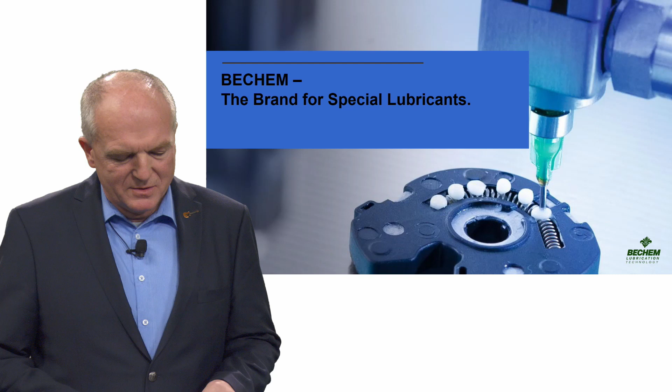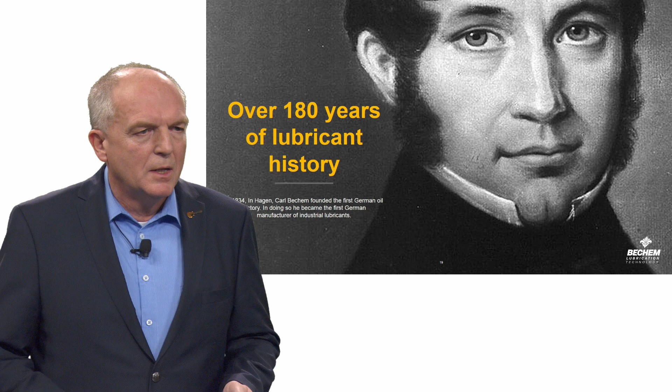Yeah, indeed. Good, so Harry, why don't we start with the introduction of BECHEM and learn a bit more about that fabulous company. It's a pleasure for me. Just a few words about BECHEM. So BECHEM, the brand for specialty lubricants. BECHEM was founded by Carl Bechem, and this is the reason for this name. He founded this company in 1834, and this is the first oil-producing company in Germany. Nowadays, we are not only in Germany anymore. Of course, we are, but we went global.

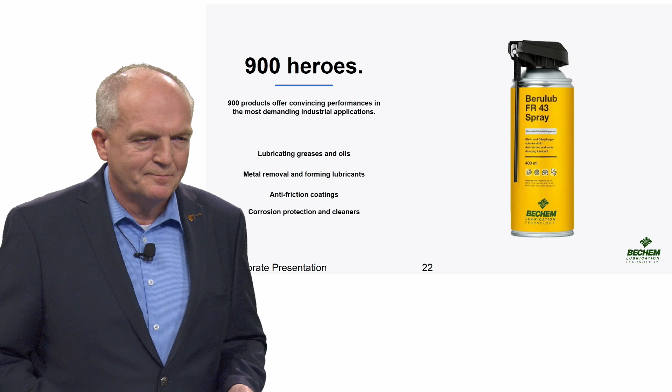More or less 900 living products, actively sold products, not only spray cans like you see here, but drums would be too big to show here on the screen, so therefore we decided to go for a can, but nevertheless we can supply all kinds of packing. And we are supplying these products in different kinds of industries. The automotive industry, the aircraft industry, the railways, mining industry, earth moving equipment, metal working, metal forming industry, food processing, wood processing industry, and so on. So we are really the specialist for different kinds of industries and different kinds of application.

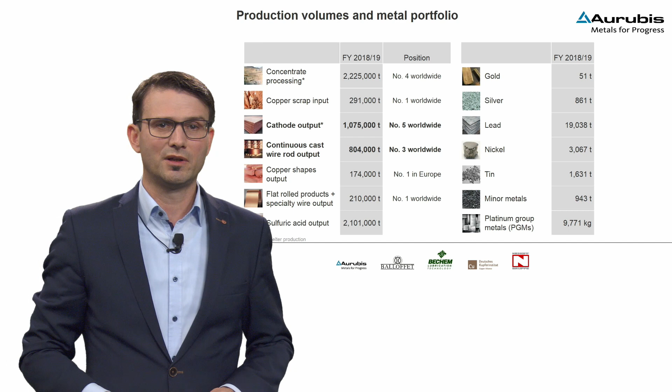Aurubis holds strong and leading market positions in cathode production output and respectively in copper wire rod output. Here you see figures from financial year 18-19 with around 1.1 million tons of cathodes and around 800,000 tons of wire rod. Beside that, Aurubis is a multi-metal refining company and produces metals like gold, silver, lead, tin and others. Aurubis has its own cathode basis, which is a fundamental position for our copper products and especially for copper wire rod, where 75% of all cathodes worldwide are consumed. Aurubis is independent from cathode supply from South America or other regions, but can rely on its own very stable cathode supply.

Aurubis runs a production network of 2 fully integrated plants with cathode and rod production in Hamburg, Germany, and in Olen, Belgium. In Avellino, in the south of Italy, and in Emmerich, Germany, there are 2 standalone rod plants with cathode supplies partly from Pirdop, Bulgaria, and Lünen, Germany, as well as Olen, Belgium. Deutsche Gießdraht, the well-known copper wire rod producer of DG Rheinrod, located in Emmerich, is now 100% integrated in the production and service network of Aurubis Group.

DG Rheinrod is a very well-known brand and stands for highest surface quality and drawability to thinnest wire diameters. The 4 rod lines are in an excellent balanced production network to supply our customers in the EMEA region, from North Europe to South Africa, from Morocco to Egypt, with around 800,000 tons per year of Aurubis rod, Rheinrod.

Responsible sourcing is becoming more and more important due to society requests. Therefore, the copper industry, and Aurubis as part of that, launched in March 2020 the Copper Mark as an industrial standard monitored and assessed by independent parties every 3 years. This goes hand in hand with the LME's responsible sourcing approach. At Aurubis, we like and support the idea that the copper value chain is mutually demonstrating responsibility to improve and develop, and we are looking forward to certified mines.

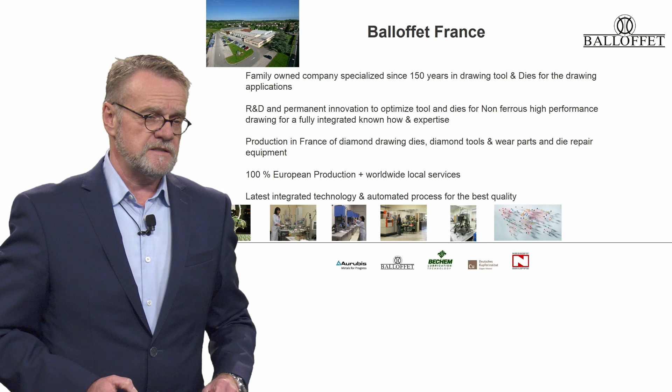We are specialists in drawing dies and tools for the wire industry. We have our own R&D department for permanent innovation and to optimize our products, especially for the non-ferrous industry. Our production is in France for dies and tools and all the wear parts. Everything is produced 100% in Europe with our best automatic process. Our products are drawing dies from natural diamond and PCD, extrusion tools for the cable industry, and also compacting and stranding dies.

Shaped dies is a very big growing market, also for electric mobility. Enameling guides for magnet wire, but also a big repolishing service for all used dies. We are also specialists in training and analyzing die repair for all people working in this field, and we produce equipment for the die shop.

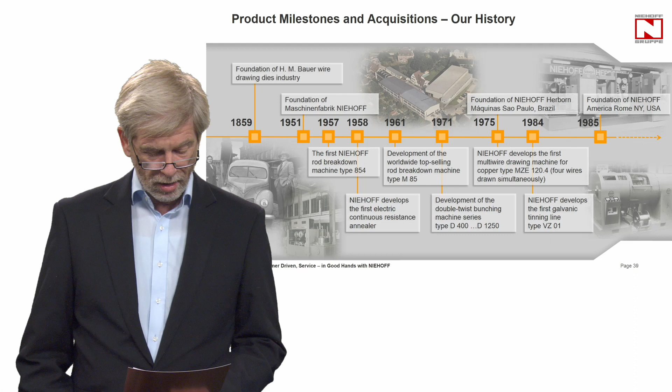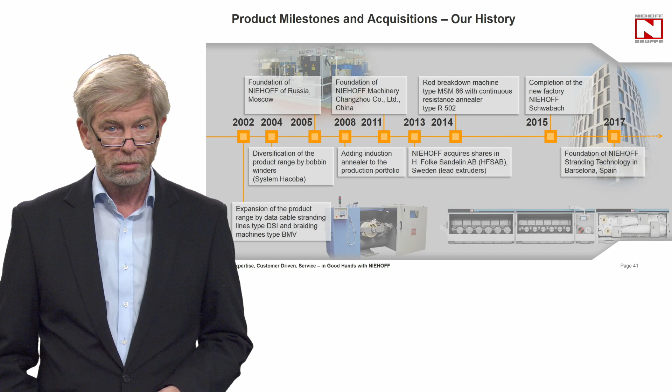NIEHOFF company was founded in 1951, but the roots go back to 1859. Listing all these historical details would be too long. However, the new construction of the factory, completed in 2015, should be emphasized. Locations worldwide: the headquarters and main factory is in Schwabach, factory number 1. Factory number 2 is in Marktoberdorf. Factory number 3 is NIEHOFF of Czech Republic. We also have factories for the local market in the United States, Swedesboro; Brazil, Sao Paulo; India, Hyderabad; and China, Changzhou.

HFSAB in Sweden is a factory for lead extruders. Sales and service centers we have in Barcelona, Spain, in Moscow, in Tokyo, and Singapore. The number of employees: in Germany we have 461, and about 10% of these employees, exactly 50, are trainees. Worldwide, we have 920.

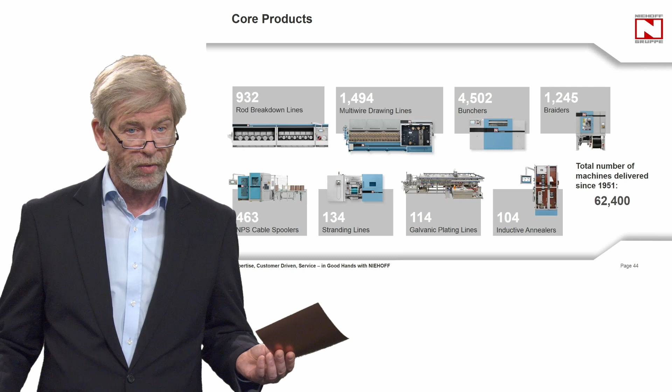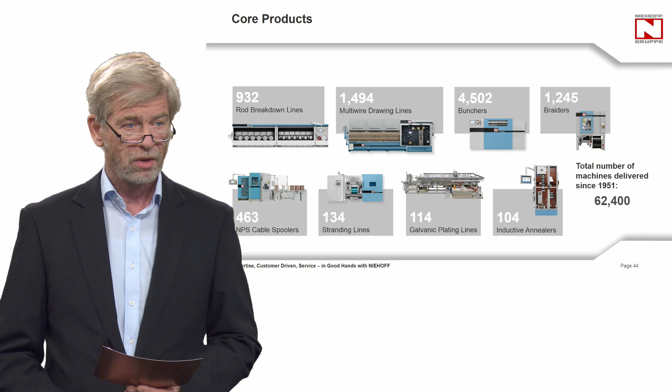Our products. Since 1951, NIEHOFF has produced 930 rod breakdown machines and nearly 1,500 multi-wire machines. We produced 4,500 bunching machines with a bobbin size from 400 up to 2,000 millimeters. Braiders, NPS spoolers, stranding machines for insulated wires, also with a bobbin size from 400 up to 2,000 millimeters, galvanic plating lines, and last but not least, inductive annealers.

Mobility, urbanization, energy distribution, digitalization, power generation. These are the challenges of today and tomorrow. And how to face these challenges? We are partnering with expertise, high cost efficiency, high flexibility, reliable service worldwide. These are the demands on us and how our customers see us.

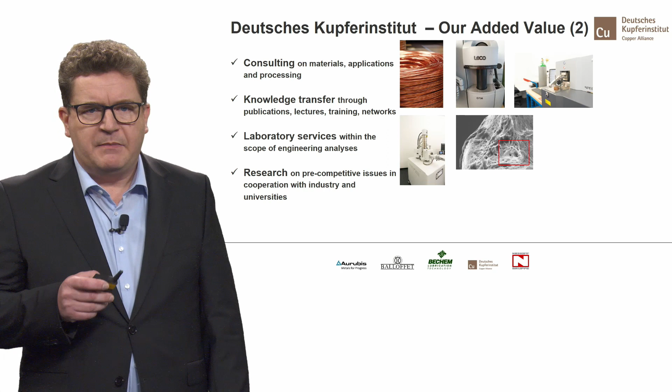Before my colleagues go into the individual system elements of the drawing process in the following lectures, I would like to give you a brief overview of the influencing factors which are relevant for the drawing process and wire breaks. But first, I would like to ask you to answer the following question via Mentimeter. In your opinion, which elements are most important for a successful drawing process? Please choose and add one after the other with a plus symbol. First the most important, last the least important. The die sets, the drawing lubricant, drawing machines, the people in the production process, or the wire material. Please vote now. We will have a look at the results later.

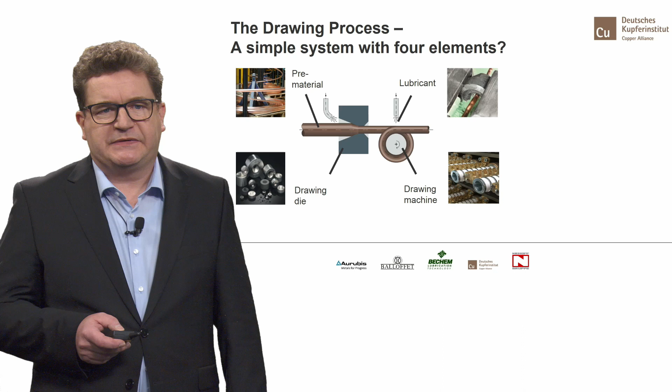When looking at the drawing process, it seems at first glance to be a fairly simple system with 4 main elements. In practice, however, the interlinking of several processes and a large number of drawing steps results in a complex system in which the causes of errors are not immediately recognizable, and the interaction of many individual influencing factors has an impact on quality and process stability. Last but not least, the conception, selection, maintenance, and settings of the system elements are based on the decisions and assessments of the people involved in the process. Knowing about the process and the elements is therefore essential to achieve good results. In the following, we will use cup and cone breaks as an example to explain the influence of the individual system elements: wire material, drawing die, drawing medium, and drawing machine on the drawing process.

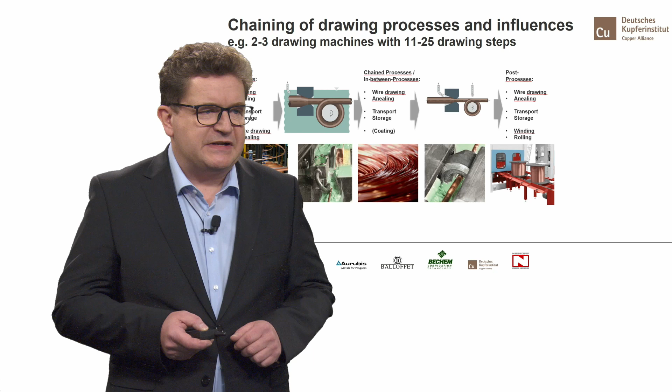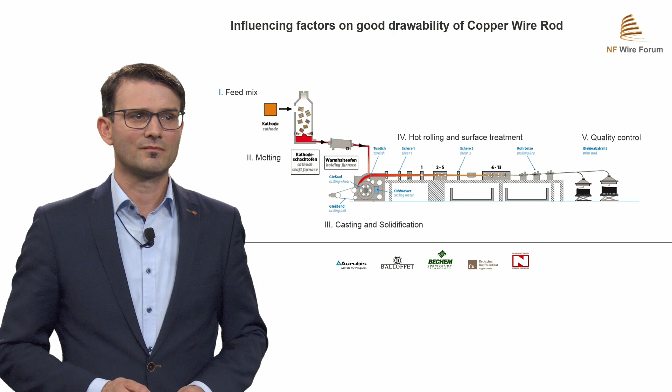Fifth, the quality control, control of the product, the parameter sets of the line, and the required physical, chemical, and mechanical properties. Please see here criteria which are important and are the basis for a successful drawing process of Aurubis rod, Rhine rod. So as mentioned before, best feed mix with grade A cathodes, oxygen content below 250,

a delta temperature of copper melt versus copper solid temperature, cooling water, min-max values, rolling current at the rolling stands as well in min and max values, low defectomat and ferromat signals, good twist test results, and last but not least, low residual oxide layer.

But unfortunately, there are incidences resulting in wire breaks, which leads to downtimes in your production departments. Important is to understand what kind of wire break type the sample shows and what leads to the different wire break types. All in all, a wire break is the unfavorable result of interactions between the wire material, drawing dies, emulsion, and the machines, as well as drawing process parameters.

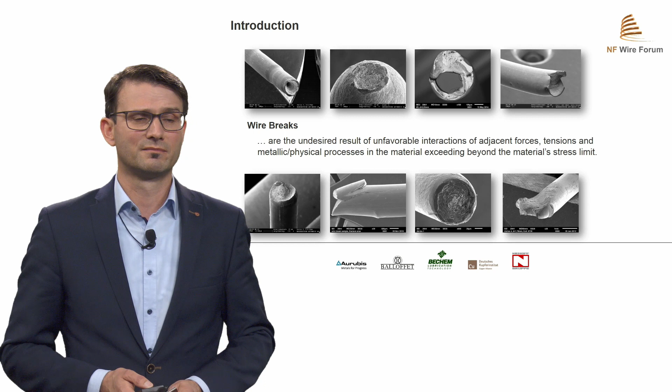In general, there are well-known wire break types, which occur from time to time in each and every wire production facility. There are three main types, which are: first, cup and cone; second, ductile force break; third, inclusion break. The other mentioned types are as well known and present, but with less frequency to our experience.

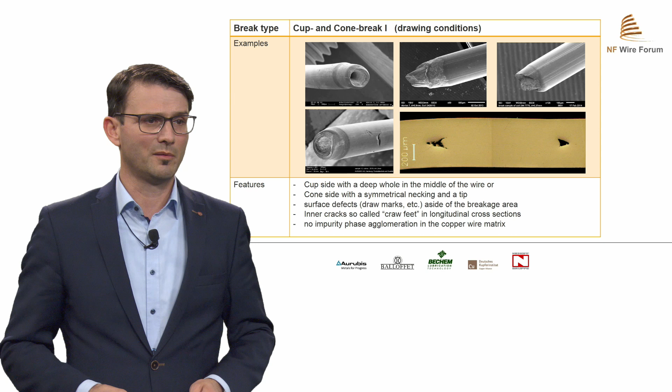What are the damage mechanisms? So high shear stresses between wire surface and the neutral line induce local failures where the max material stress level is exceeded. Then the inner cracks, the crow's feet, are beginning. The tip of the crow's foot is orientated in drawing direction. With additional strain, these cracks grow and reduce the load-bearing cross-section of the wire until the material fails or breaks.

As well, the copper wire rod can influence cup and cone breaks, but that is the reason mentioned at the beginning of my presentation to rule and apply the appropriate production criteria to avoid cup and cone breaks.

Now let's have a look on the Mentimeter results. What you voted, what is your favorite wire break, what you see in your productions. I'm not surprised, cup and cone and inclusion breaks. That fits to my expectations.

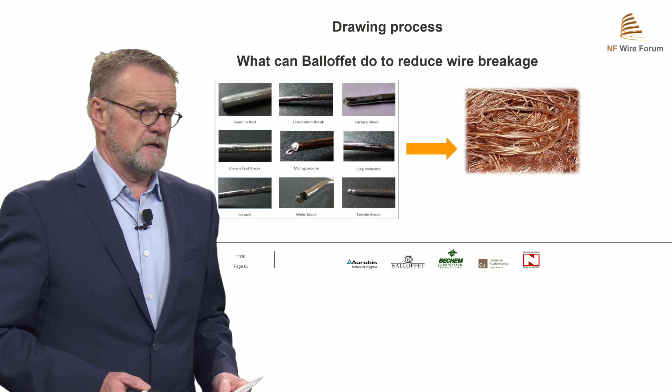Wire breakage is not really nice. Nobody wants to have these because wire breaks normally mean less productivity. We lose a lot of material. It is inefficient. But the question from my side and from the Balloffet side is, what can Balloffet do to reduce wire breaks?

The wire breaks, the view from the die producer is as follows. We have to check if the customer has used the wrong diameter, or the geometry is not respected, the polishing is too rough, the dies are not cleaned, we have a mishandling on dies, we have imperfect technical matchings, so the specification from the drawing machine is not corresponding to the die sequence.

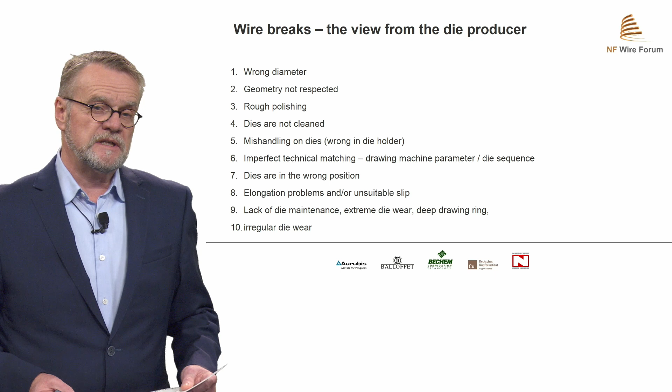The dies are fixed on the wrong position. The elongation problems and the slip is not suitable. We have a lack of maintenance, die maintenance. We have a lot of die wear. We have deep drawing rings, or we have irregular die wear. This is mostly a problem of wire breakage.

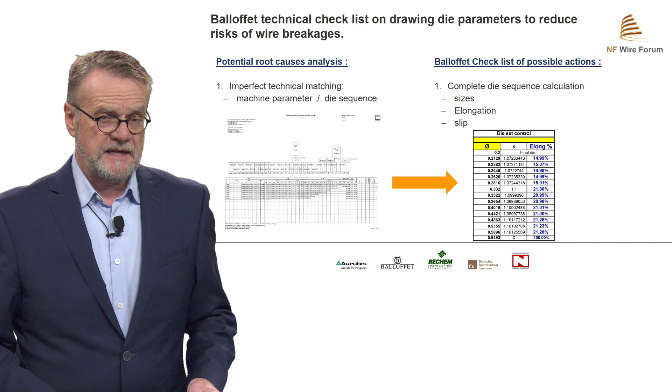At first, we have a checklist, and our technical checklist from Balloffet is to check all the parameters to reduce and to find the result. The root cause is, at first, we have to check the machine parameter and the machine specification, and to clear if the machine parameter is fitting to this die sequence. This is what we have to control, and you see here in these tableaux that you can check if this is correct.

The next step on the checklist is the check of the elongation. Is the elongation respected? What we have here, and what is later on the possible action by us, is to control if the difference between the die elongation and the machine elongation is checked.

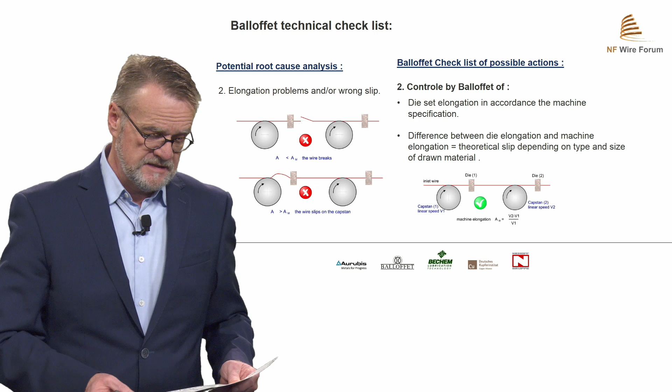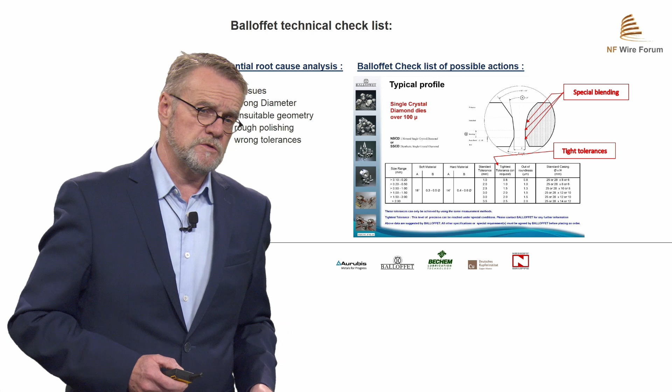On the dies, we have also many issues to control. The diameter at first, but also the not fitting geometry. We have to check the polishing, and we have also to check if we have used the probably wrong tolerances. For these, we have a special specification where we see in the die if the blending is well made, and if we have on a multi-line machine tight tolerances, because we have to check that time to time we have 500 dies on the machine, and these has to fit.

The die analysis also checks the issues in the die. Is the die size with the adapted tolerances produced? Is the die geometry respected? The die blending, meaning from the angle to the bearing length, is this well polished? Is this not too sharp?

And this mirror polishing is made. Also the exit is very important, because if we produce in the wire process some fines, then we produce the fines on the exit of the die. So it has to be nicely rounded.

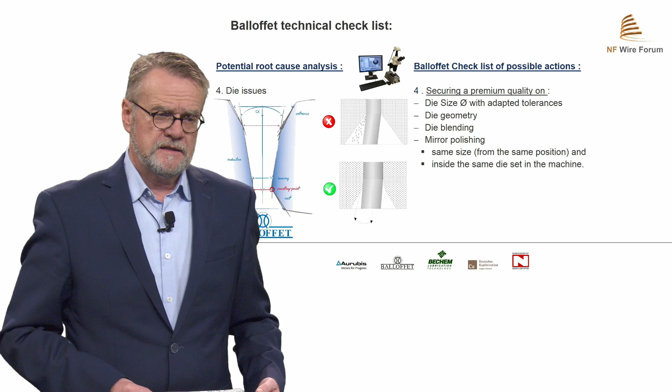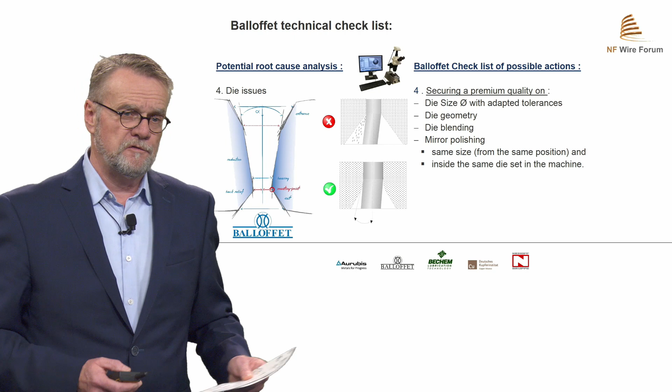And what is very important on a die set, is that all the same sizes on the same position on the machine has to be respected. And this means not for one set, for all sets, and in total probably 500.

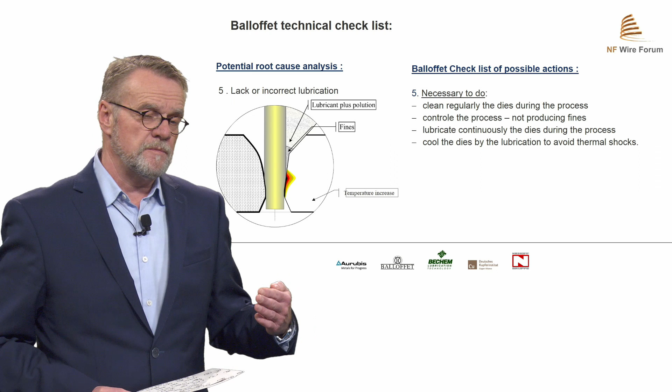Coming back to the next check, what we have to do is the lubricants, because we have to secure that the die is very clean and very regularly cleaned with a spray of lubricants during the process. Because if you see some fines in the die, it is coming from the die before, and the result is seen on the next coming die.

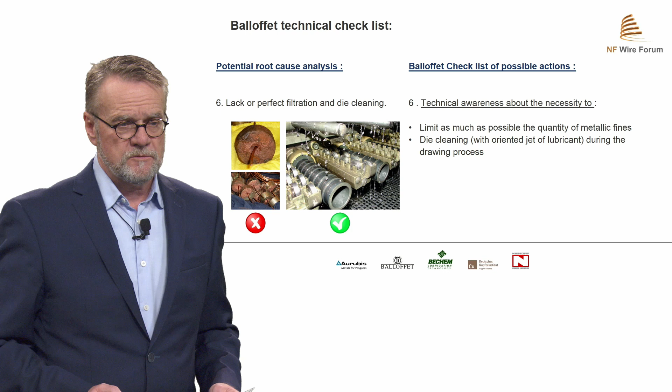The lack of not perfect filtration and die cleaning limits as much as possible the quantity of metal fines. That means reduce the metal fines and clean the dies during the process, and this has to be made by a jet of lubricants during the drawing process.

And also the extreme drawing parameters, because we're using high speed, we have ultra-fine wires, we have a reduced slip. That means our dies has to be perfect, absolutely perfect. We have to check if there is a drawing ring inside, because in a drawing ring we are sticking material, and we take this material into the next die and we create problems. And if we have these problems, we create thermal shocks, and the thermal shock means we can produce a diamond pull-out or a breakage of the die.

We have to check also the impact point, and if we take out a used and worn die out of the machine, we can read in a die like in a book.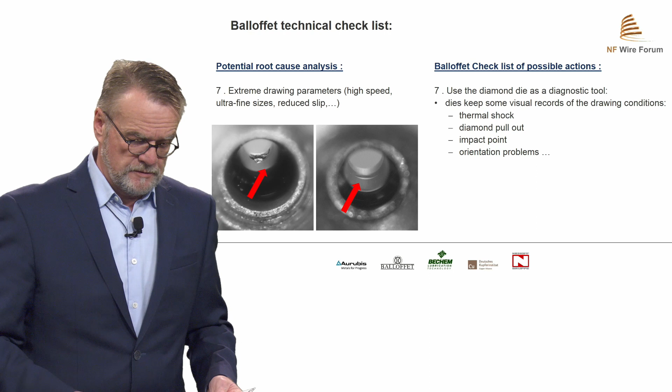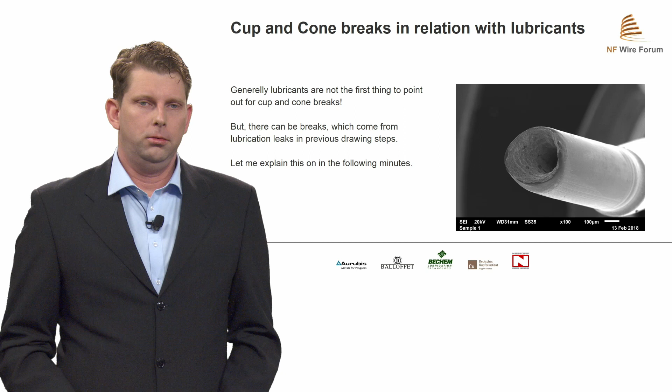Honestly, in general, the lubricant is not directly the first thing to point on if you have a cup and cone break. Nevertheless, it can be a cause for a cup and cone break if there were failures in the previous drawing steps, especially in the rod breakdown. I will explain this in the following slides. But as Michael already said, also a lack in lubricity due to lubricity failures because of dirty dies or missing lubricant are points to get a cup and cone break due to lubricity.

So if we look at the rod breakdown, you can drive it with different drawing options. Typically, it is driven with a concentration of 12 to 18%, but it is also possible to drive it with 5 to 8%. But what is the result of this different drawing option?

First of all, let us take a quick look on saving calculation for the lower drawing concentration. Let us estimate a system with 10 cubic meters and a price of 5 euros per kilogram for the lubricant. If we drive it with 15%, we would need 1,500 kilograms of lubricant and would rise to a price of 7,500 euros for the filling. If we do the same with the 5% concentration, we have 500 kilograms and 2,500 euros, which gives you a saving of 5,000 euros estimated, plus maybe another 5,000 euros over the top-up time for one year driving. That would be 10,000 euros in total.

But what does this mean for the drawing process itself? First of all, your rod breakdown system maybe has to be driven a little bit slower. Normally 25 to 30 meters are possible. Now you can only drive 20 meters, for example. So you have a reduced production capacity.

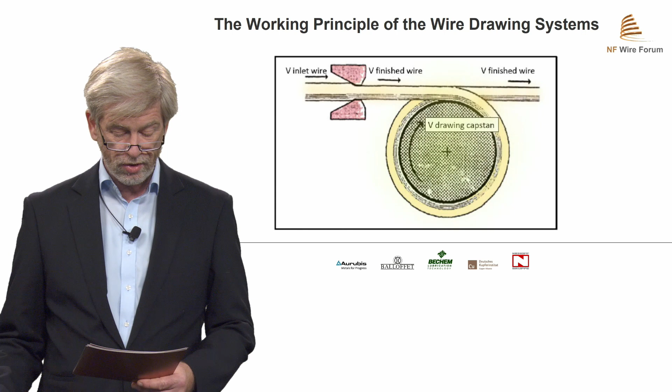This is the working principle of a drawing machine. The wire gets compressed in the die, and the diameter decreases while the speed increases. Here we need lubrication to lubricate or cool the process. Without or with too little lubricant, the drawing die and the wire will be destroyed. Surface roughness, wrong angle, wrong diameter, a wire break is inevitable. A broken wire based on this is normally a cup and cone break.

The wire is compressed in the die. We learned we have elongation between 55 and 26% for a rod breakdown process, and between 26 and 10% in a multi-wire or fine wire machine.

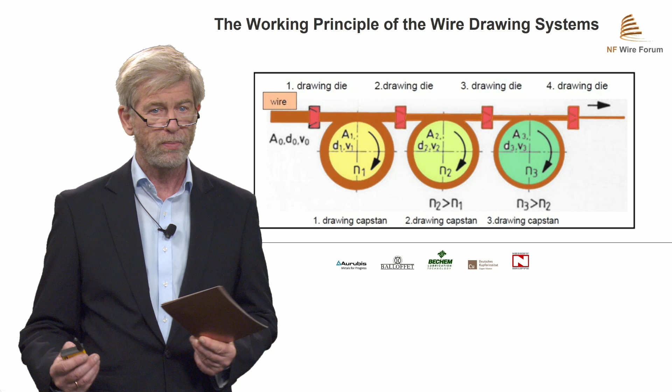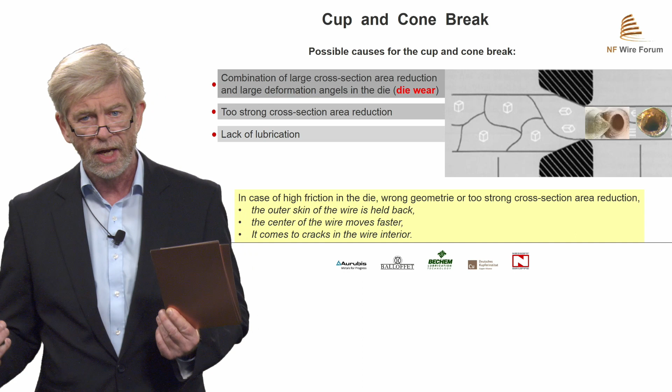For this process to work properly, everything has to be perfect. But now let's see possible causes for the cup and cone break. There can be a combination of large cross-section area reduction and large deformation angles in the die.

That's called die wear - too strong cross-section area reduction or lack of lubrication. In case of high friction in the die, wrong geometry, or too strong cross-section area reduction, the outer skin of the wire is held back. The center of the wire moves and it comes to cracks in the interior.

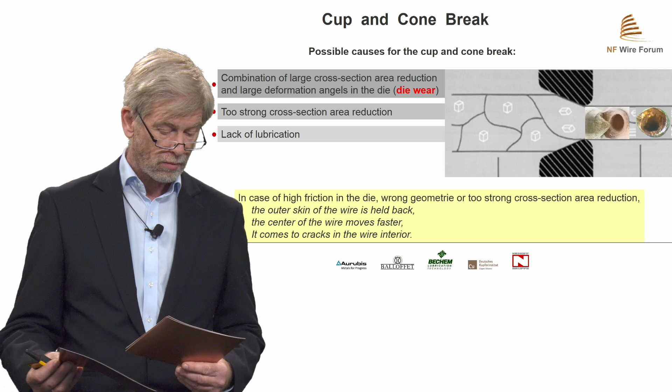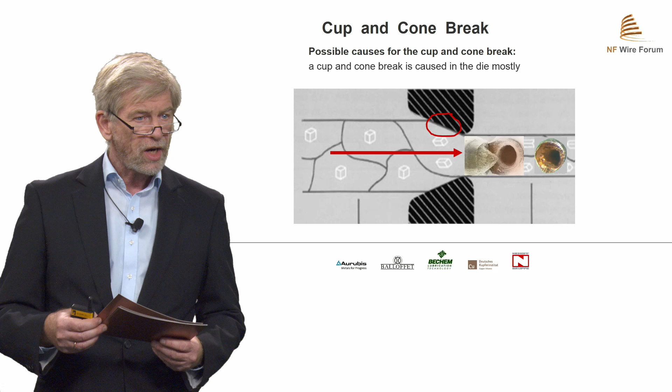Possible causes for a wire break: a cup and cone break is normally caused in the die. Here we see a damaged die.

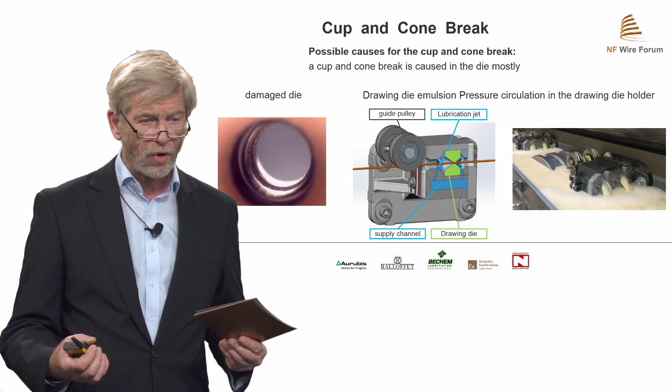The next picture shows an emulsion circulation system in the drawing die holder, how it should be - emulsion flow, how it should be. But if the die holder is dry, then it creates problems. If you don't clean the lubrication system regularly, the flow channel can become clogged with deposit or copper flakes. No lubrication comes to the die, a wire break is inevitable.

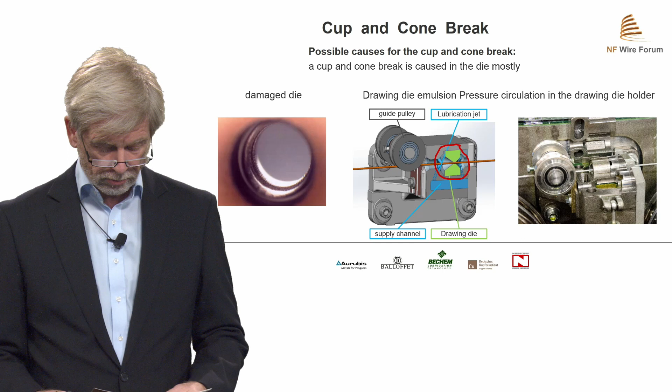So, something about the wire break: the cone tip of the break always shows in the direction of the drawing. But notice, if in a fine wire drawing machine or multi-wire machine the cone tip shows against the drawing direction, then it's a clear indicator that the error cause originated in the rod breakdown machine.

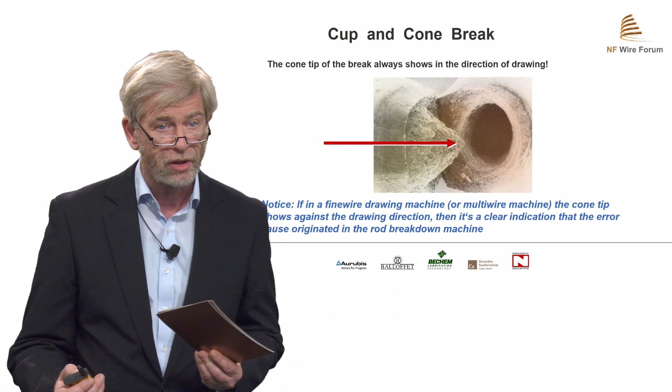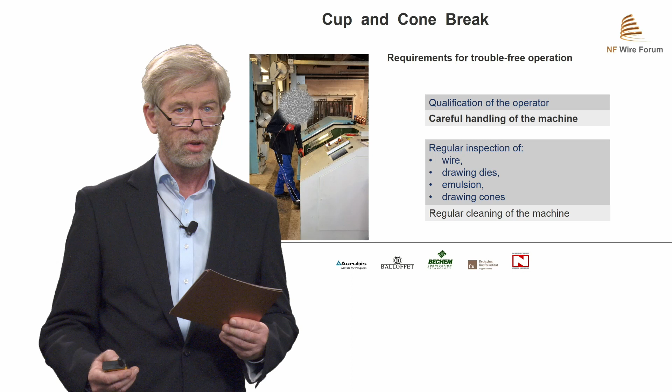Some requirements for trouble-free operation. The first thing I want to mention is the qualification of the operator. This requires: careful handling of the machine, regular inspection of wire, drawing dies, emulsion, drawing cones, the filtration system, and regular cleaning of the machine.

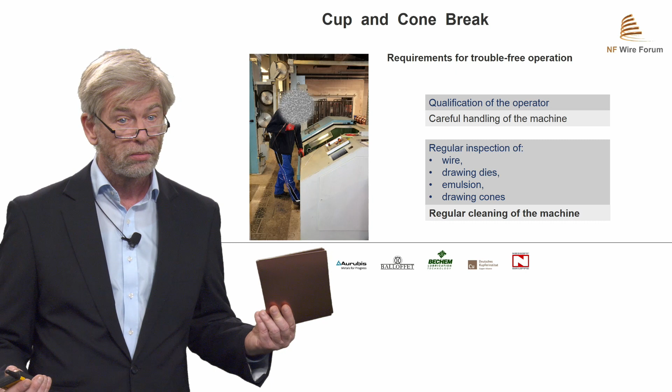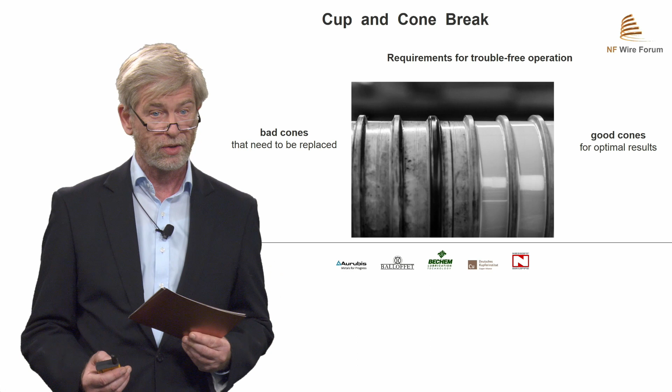On the left side, we can see a bad cone that needed to be replaced. On the right side, a good cone for optimal results. Here are some examples of how it shouldn't be. The last example doesn't cause a cup and cone break, it causes a tensile break - this is a tensile break, not a cup and cone.

And here we are at the end of my presentation. So if you have questions, don't hesitate to send me an email. I will try to answer them.

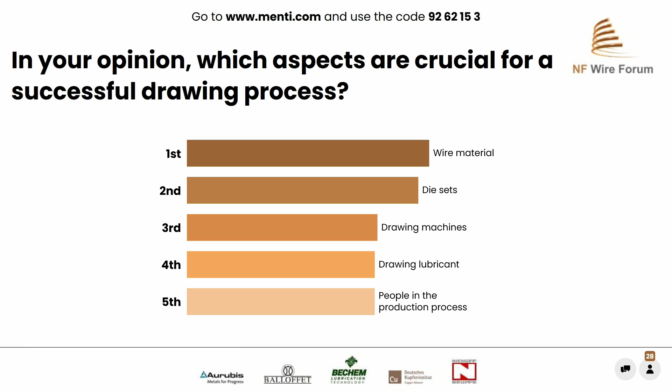Welcome back to start our panel discussion with all 5 partners right now, here live on the stage. So, what do you think about this result? Is it as expected? Cornel, please comment on being first in that ranking, the wire material.

Yeah, I'm not surprised about your answers and your votes about the wire material. It is important, as shown in my presentation, but it's only one component in the system of what we have - the machine, the dies, the lubrication. So everything counts, and the rod is one part of it.

Thank you, Cornel. I believe the second one was the die set. Michael Biller, what do you think about that? It's nice to see from our side that die sets has this big meaning in the process, but as Cornel said, it is really one of the parts for optimized production. We need a good machine, we need good pre-material, we need also good knowledge of the worker on the machine. Die set is important, but also the lubricants, we can't forget.

And all the things are working together. We can't take one as the main part. It's a combination of all 5 things. Thank you. And indeed, of course, all the 5 dimensions, let's say, got votes. But the third in the ranking was the drawing machine. So Stefan, what do you think about that?